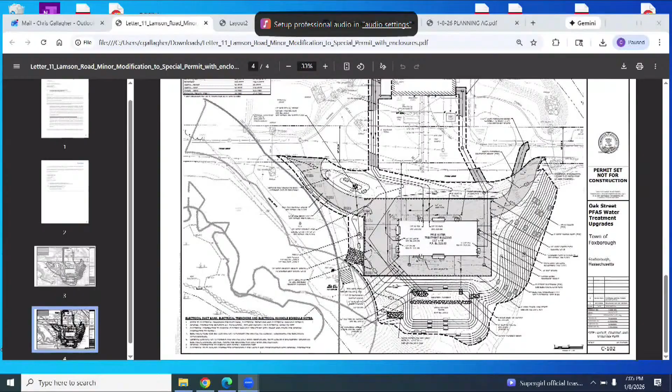We are here to discuss quickly some modifications to the site plan for the PFAS treatment plant down on Lamson Road. As we walked through the permitting process with conservation, we had feedback from DEP that the existing gravel roadway we were going to pave is within the 100-foot buffer zone. It was going to trigger additional state review that would hinder our timeline to get this project out to bid. So with that in mind, we took what is a gravel road and we're going to leave it as a gravel road, and shift the new paved access to the PFAS plant outside of the buffer zone.

It does remove a detention basin that was in this area for the wetlands. We create a small swale and then pipe back to the larger detention basin on the backside of the building. It allowed us to do some regrading as well in the design. So that's the major change.

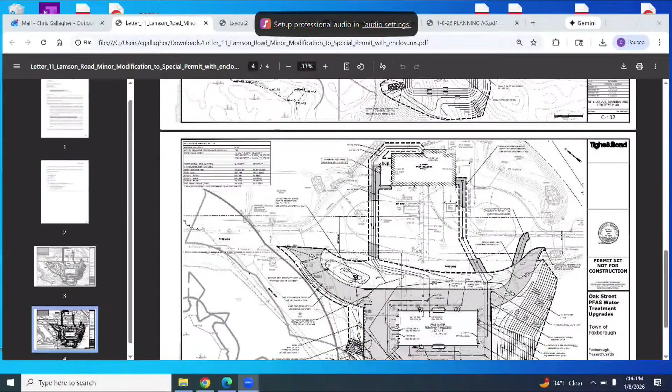We also have a small addition required on the existing green sand filter building. It's a 450 square foot addition, but it's existing paved area, so it's net neutral on impervious area. We did speak with the fire department. Our outgoing Deputy Chief Laracy did okay it, confirming it's not going to hinder their access around the backside of the building if in the future we have to get to that point. So those are the two small changes we're looking to bring before the board tonight.

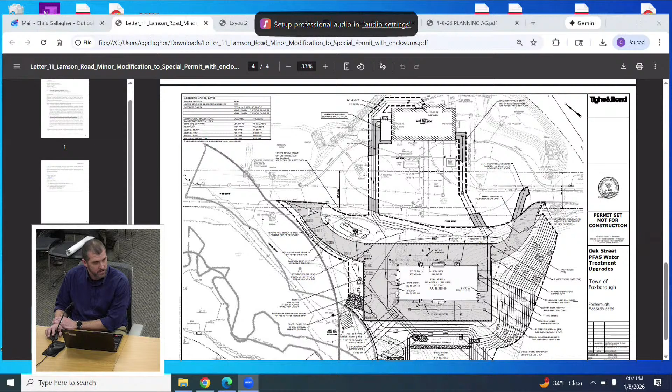The paving actually is a reduction - I think we have almost 4,500 square feet reduced since the last special permit filing. It should be a net reduction in cost because we have less pavement.

Does it make it more difficult for truck access? No. My recollection is we had some conversation about the paving right around that footprint when you came in before, and we've revisited it. I think what we have is an improvement over the plan we had before you in the past.

Any other comments or questions? No, I'm fine. No.

So then I'd make a motion that the board approve the request for a minor modification to the project on Lamson Road, the new PFAS plant, for a reduction primarily in paved area, as well as a small addition to the facility. I'll second that. Other questions? All those in favor? Aye.

Good, thank you guys. Appreciate it.

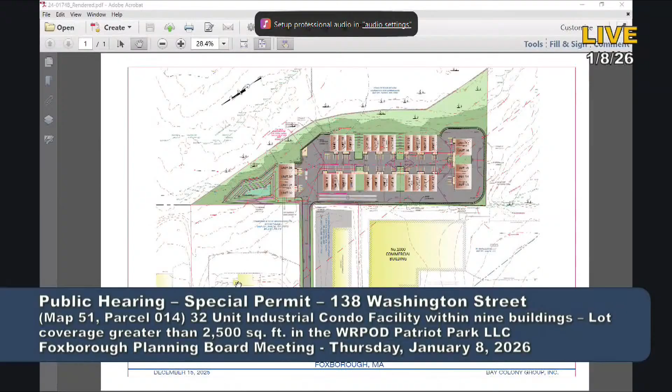This lot has 50 feet of frontage along Route 1, and it will be accessed through a shared entrance with 140 Washington Street. That entrance has been previously constructed, so it's existing there today in anticipation of this future development. The property is located within the Highway Business Zoning District.

The property is located partially within the Water Resource Protection District, Zone 3. You can see the red dash line that goes through the driveway, and then through Unit 11 and Unit 16 and 17. That's the limit of the Water Resource Protection District, so everything to the left is within that district, so a good portion of our site sits in it.

The property is bordered by commercial properties along Route 1, the State Police Barracks to the north, and Foxborough Conservation Land to the east. To the south is just an extension of 1000 Washington Street; they also own down there.

There are wetlands located on this parcel in the eastern portion of the property, shown in light green. There's also additional wetlands located to the south off the site, and there's an intermittent stream to the north, shown in green.

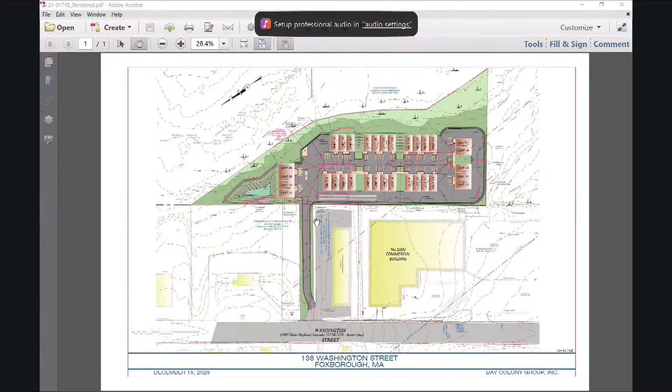Is your client mom, is that who it is? No, it was subdivided from the parcel that is mom's house, so this is a separate individual now, it's not mom's. Are these businesses or storage units? So the intent is they're gonna be individual contractor bays, for electricians and plumbers. He hasn't made a decision, it could be rentals or he could be trying to condo them, but that'll be a decision moving forward, we don't have an answer yet.

I'm having a little trouble following some of the topo lines here, but just in terms of your paved area, the footprint itself, how's it going to be pitched, and what sort of site work will be required to get it to that?

So yeah, it's kind of hard to tell here, but for the most part, this site is surrounded by retaining walls. We have a very high water table on this site, so this site has got to be built up significantly. I have retaining walls going around the site that vary from 6 feet all the way to 12 feet. But yeah, I need the design up from the water, as you guys know. So the septic is really driving the train here, as well as the stormwater system.

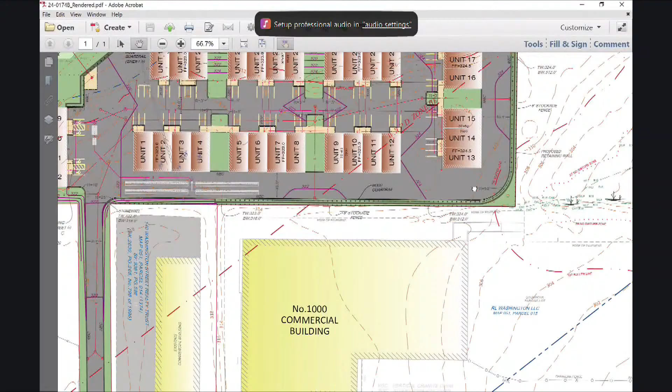And then the question I have is, you're saying you're putting up retaining walls. Could you help me by pointing out where those retaining walls would be? So we have a retaining wall beginning basically right at the edge of your property that will encircle the site, and all the way up to here.

So that retaining wall is going to be block, or it's going to be... So we just proposed a detail for a stone strong wall, which is typical to what we use, but ultimately it'll be the decision of the contractor, and that'll need to be approved by the building commissioner. So are you saying that it's going to be a poured concrete wall? No, the stone strong walls are those individual blocks I usually see. Oh, they kind of look like big Legos, and they stack them up. Yeah, I'm familiar.

And there's no, I'm assuming you took into the calculation that there would be no drainage coming back to our property from this property, with all the walls holding back whatever drainage might be coming toward us. Yeah, so this site, I designed it so all the pavement on site will be draining into the on-site drainage. So there may be minimal runoff just from the grass area, but I know you have a big berm along here at the back of your property.

So as the people are behind the end of our property, as we abut it, are they going to be well above the grade of our driveway so that our tenants are looking up at vehicles above us?

Yes, so like I said, with this site we have really high groundwater, so everything's got to be built up in that area. Do I understand? Yeah. So after the wall goes up, the Lego blocks, as you described them, is there going to be a fence above that?

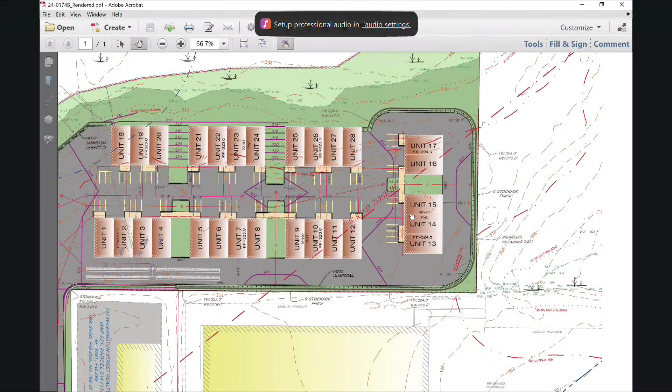I understand that's behind the state police, isn't it? No, this is you right here, at 140. Okay, sorry, yeah, so it'll be along this whole western property line. What about the property line that comes in from Route 1, that goes the whole length of the driveway? That right there, as you're looking at it, yeah.

As I said earlier, we were originally going to propose just a natural buffer in this area, but Gabby forwarded us your letter and we had discussions with our client. We have no issues with doing additional plantings in there, whatever it may be, to provide additional screening. I really don't have a problem with the project if it enhances Foxborough and creates more profitable businesses.

My only concern is I don't want anybody coming into our property, or who's there now, to have to watch all the trucks go by nonstop. That road's going to be a relatively narrow road, so in the buffer in between, as long as there's something visual that separates us, preferably not a stockade fence like you're doing in back, which is fine, that would be helpful for us.

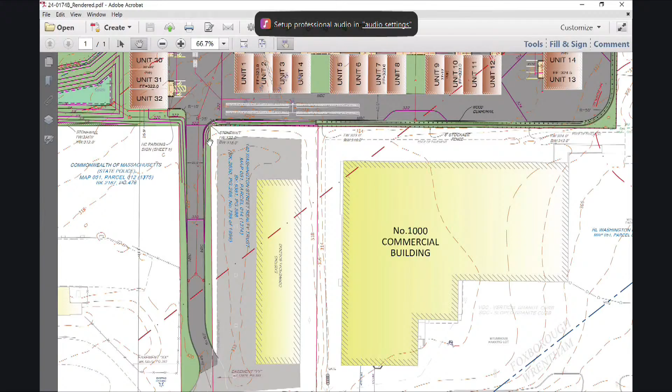Okay, that would be no problem for our client. We'll forward it to you, Jay. When we get the planting plan, we'll forward it to you so you can look at it before we come back. I think those were my questions. I appreciate the time.

It's a little difficult to read the elevations, the topos here. Cam, correct me if I'm wrong, on this gentleman's property, closest to the new proposed property line for the driveway, it's about 318. Yep, the driveway's going to be about 320. So there's only about a 2-foot difference right there? It seemed like there was more in conversation.

What'd you say, 318? On this, it has 314 close to the road, down by Route 1. Oh, down there. I was looking at the back. His property, if you look at the screen, is the one running vertically, the yellow building. And that red dotted line right near the cursor is 318, and the driveway's at 320, so that's really not a big difference. It sounded like there was going to be a lot more.

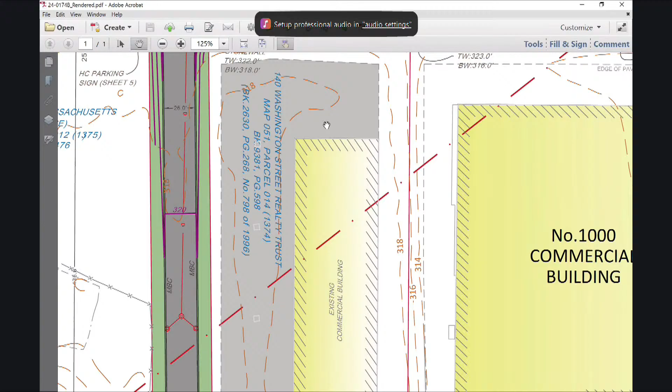And you have everything pitching in the back of those units 1 through 11 towards the catch basins in the corner. Yeah, so we match the existing grade coming in, and then we start to climb up to get into there. But the way I designed this site, essentially it's just hills and valleys, trying to pitch the stormwater towards our catch basins where we want them.

What is the width of that drive, the one coming in? So it's 26 feet. I gotta leave it. Okay, yeah.

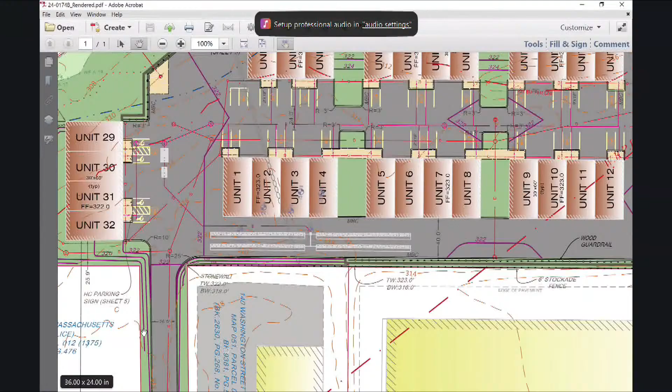And I take it probably the largest vehicles going in there anticipated would be box trucks. Yes, so we anticipated that, and we also did the Foxborough Fire Department's ladder truck and ran it around there, and everything was okay.

So, not that anybody's going to hold the owner to this, but is it their intention to build out the whole thing and then lease up or sell? Or are they going to phase it? Do you have any idea? I believe their intention is to build out the whole thing and then rent out the individual units.

It's usually just a couple of guys coming in the morning and going out. We have a contractor building next to my property, Mr. Green, and there's minimal traffic. How many bays does he have up there, Bill? Is that like 11 or 12? At least, yeah, drive-through.

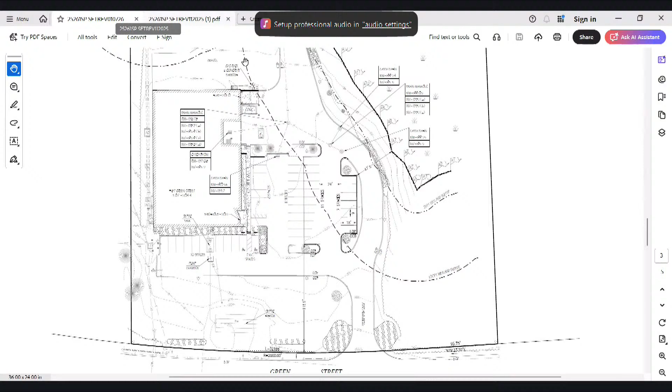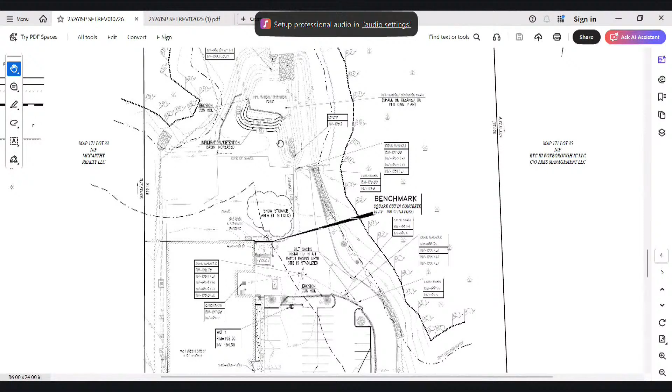This is the drainage and grading plan. The natural grade of the lot pushes water towards this catch basin here, so we'll be keeping that same grading. All of this new pavement will drain towards this catch basin. It's currently a deep sump catch basin, but we will be replacing it with a water quality unit to provide further treatment. That will drain into the detention basin, which we are expanding to accommodate a 100-year storm from that additional runoff from the pavement.

This was originally designed a little differently and went through conservation and got approval. We came and found out we needed a 100-foot buffer for the parking from the street, as there is residential properties across Green Street. So we had 18 spaces located here along the front, which we had to get rid of. We originally had 10 spaces here, so we expanded that to 18. So we will be going back to Conservation on February 2nd for a minor plan modification approval. This updated design increases the pavement area within the buffer by about 1,300 square feet.

Right now, snow stockpiling is generally done in this lawn area in the front. It'll remain the same. Basically, everything will be pushed away from the wetlands, away from the 100-foot buffer, and snow storage will be done here. Any stockpiling done during construction would be done in this area, although it's really mostly just removal of about 6 inches to about 1.5 feet, of soil. We won't be bringing anything in, just site grading and paving.

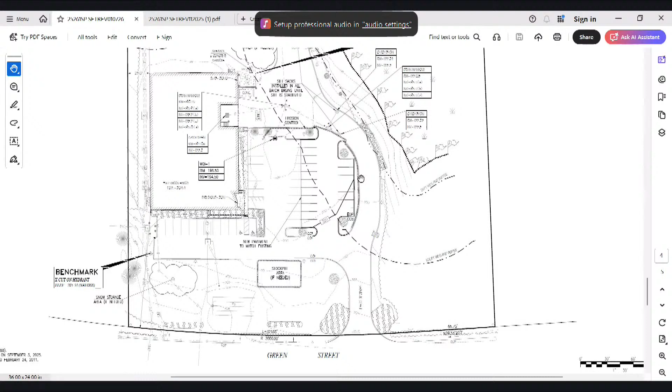We do have erosion control right here along the limit of work. Snow storage for this lower area is handled in this gravel area here, and it will remain that way. That is it. I'd be happy to answer any questions.

Just for clarification again, the net increase in parking is 18? Yes. Wow, seems like a lot of work for 18 spaces. He's also putting 70% of those in the wetland buffer, so how are you going to address that?

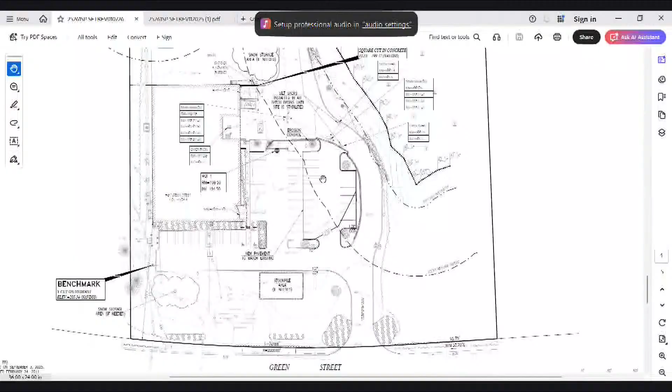Did you understand the question? No. Basically all of the runoff from that is going into a water quality unit. None of the runoff will go directly towards the wetlands, so it'll all enter the drainage system on site.

The point that I raised was the fact that you've got 70% of your proposed new spots within the 100-foot buffer. The conservation agent reviewed the revised plans, and he has no concerns because of the way the water is being moved away.

I didn't know if a semi-impervious surface would be a better option, but... There's better and there's what's allowed. Yes, yes.

Well, I don't really have any questions. The stormwater was reviewed by the town engineer, Kevin Davis. Since it was a pretty small project, he was satisfied with the calculations submitted. I have no problem, subject to conservation signing off.

And we wanted to run this by the conservation agent, because we wanted to make sure that the plans are not going to change again, and so that the board can approve these plans and not have to modify them again.